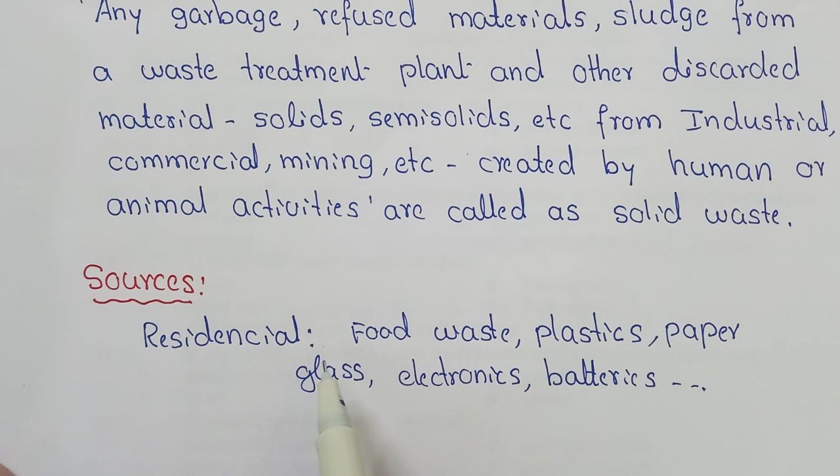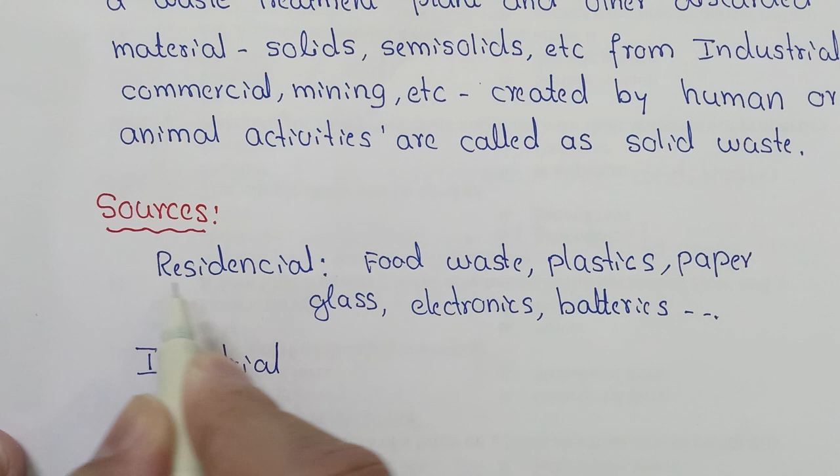The solid waste entering the environment, with residence as the source, is called residential solid waste. Then we have the solid waste coming from industry, called industrial solid waste. One is residential source, the other is industrial source.

The industrial source - these industries are known to be one of the biggest contributors of solid waste, which may include light and heavy manufacturing industries, construction sites, fabrication plants, manufacturing industries like the manufacture of plastics, tires, clothes, etc. Then construction industry or construction sites.

Then fabrication plants, refineries, power plants, processing plants, mineral extraction, chemical plants, etc. These industries produce solid waste in the form of housekeeping waste, food waste, packaging waste, ashes, construction and demolition materials, special materials used as primary source for their production, medical waste, as well as other hazardous waste. So many types of waste produced in the form of solid from industries is called industrial waste.

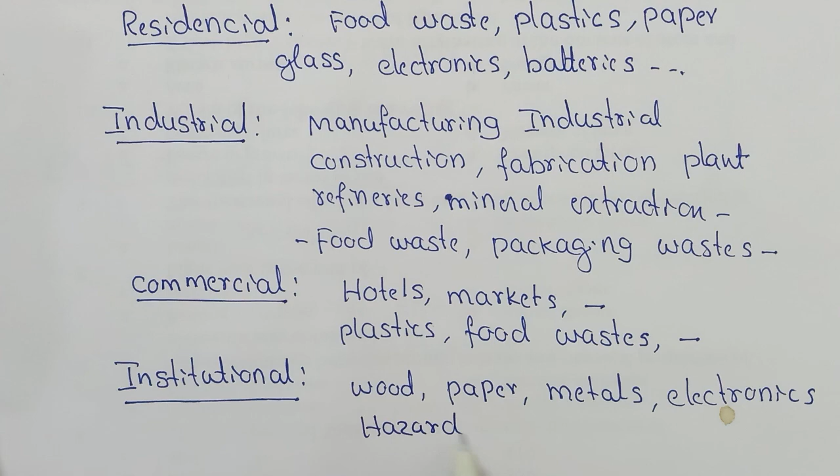Then we have the source of solid waste in the form of institutional - from institutes, different academic buildings, schools and colleges, including prisons, military barracks, and other government centers. Here also solid waste is produced. It may include glass, rubber waste, plastics, food waste, wood, paper, metals, cardboard materials, electronics, and some hazardous chemicals coming out in the form of solid waste.

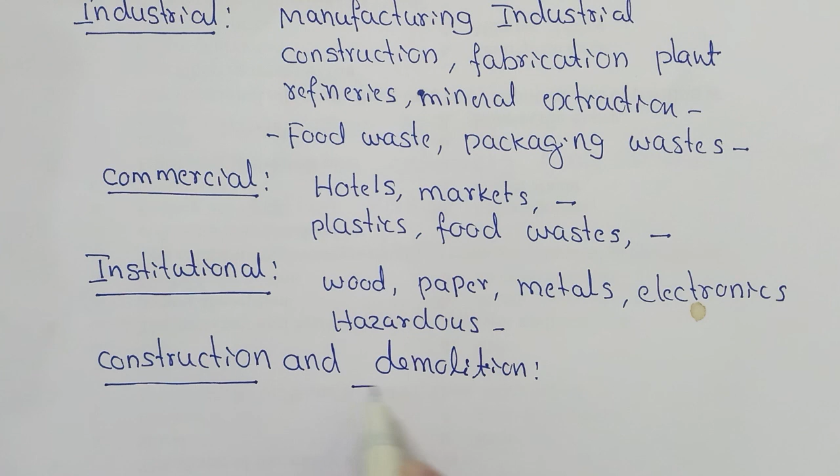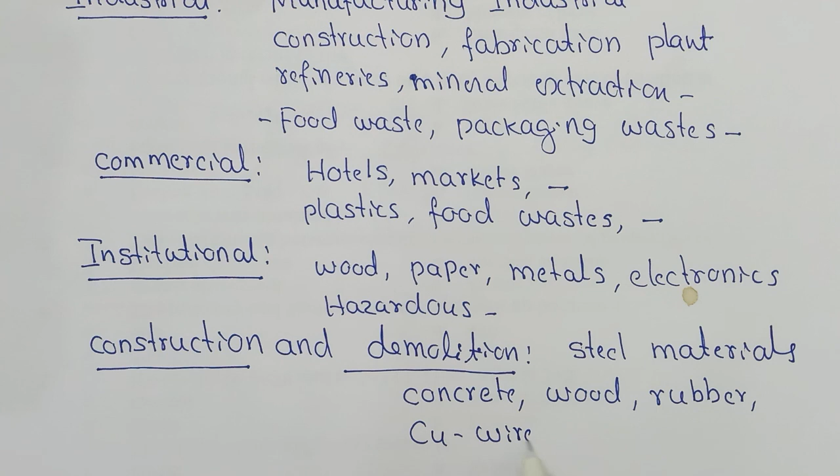Then we have the construction and demolition area. Construction and demolition sites also produce large amounts of solid waste entering the environment. Some of the solid waste produced in these places includes steel materials mainly, and it may also include concretes, wood, rubber, copper wires, etc.

Then the solid waste may also come from agriculture - crop plants or dairies are the solid waste which are coming from agriculture. The spoiled food, pesticide containers, and other hazardous materials coming from the agriculture field or source.

Then we have biomedical source, biomedical solid waste. This refers to hospitals, biomedical equipment and chemical manufacturing firms. Some of the solid waste include syringes, bandages, used gloves, drugs, paper, plastics, food waste, and some chemicals in the form of solid waste. All these require proper disposal, or else they will cause a huge problem to the environment and the people in these facilities, those who are nearby or utilizing other sources may be troubled because of this biomedical waste.

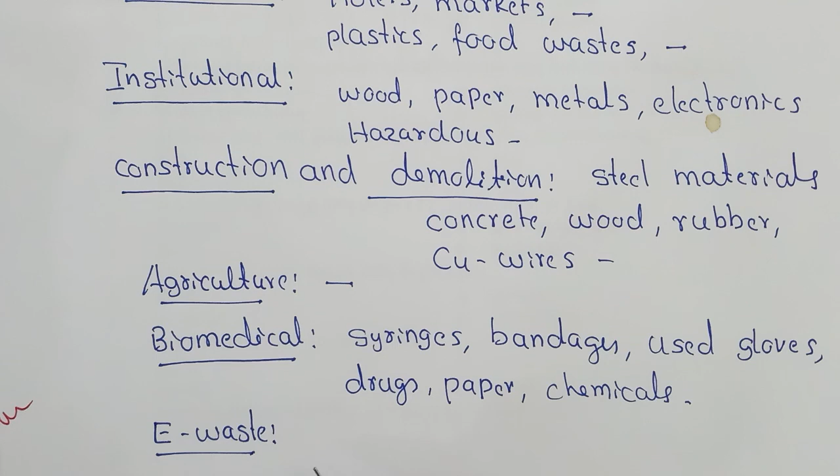And the last one is e-waste, electronic waste. The term for electronic products that have become unwanted, non-working or discarded materials. E-waste is created from anything electronic - it may be computers, televisions or monitors, cell phones, VCRs or CD players, or fax machines, printers, etc.

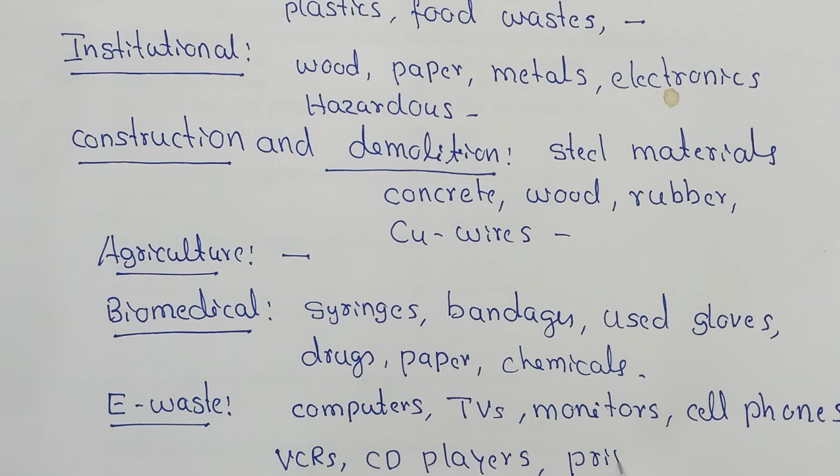Now these are all the sources. Mainly we have residential, then industrial, commercial, institutional, construction and demolition, agricultural, biomedical and e-waste.

Dear friends, we have seen what is solid waste and what are the sources for solid waste. Now let us see what is solid waste management.

A lot of solid waste is produced mainly because of human and animal activities. It enters into the environment and creates adverse effects. So how to manage it? What is solid waste management? It is the discipline associated with the control of generation, production of waste, storage of waste, collection, transport or transfer, processing and disposal of solid waste materials in a way that best addresses the range of public health, conservation, economics, aesthetic, engineering and other environmental considerations. So how best we can handle the solid waste that is produced is called solid waste management.

There are risks associated with poor management of solid waste due to improper disposal of municipal solid waste on the roads and immediate surroundings. Biodegradable materials undergo decomposition, producing foul smell and becoming a breeding ground for disease vectors. Industrial solid wastes are sources for toxic metals and hazardous waste that affect soil characteristics and productivity of soils. Toxic substances may percolate into the ground and contaminate the groundwater.

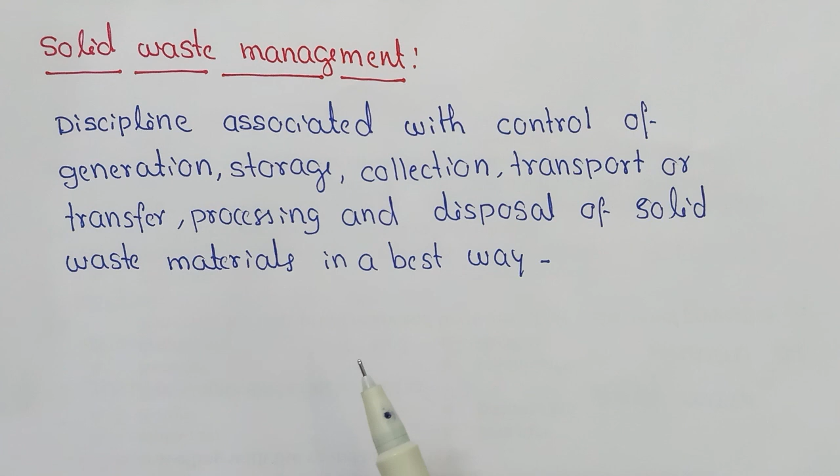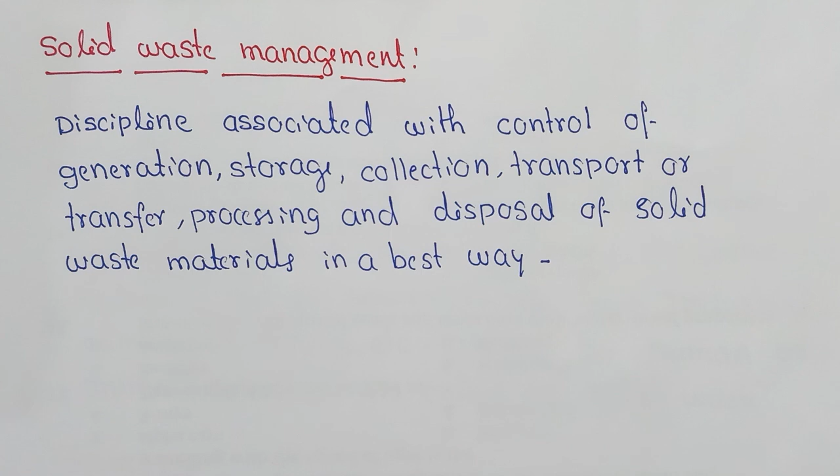Burning of industrial or domestic waste may include pesticides, plastics, radioactive materials, and batteries, and it produces furans, dioxins, and polychlorinated biphenyl compounds that are harmful to human beings. Fine grained materials, pathogens, decomposition of waste generating greenhouse gases and other gases, dust, smoke causes air pollution. Overall, environmental degradation occurs due to contamination of air, water, and soil via gaseous emission, particulate matter, ashes, etc. So the environment becomes irritated, the plants get irritated, human beings get irritated because of poor waste management.

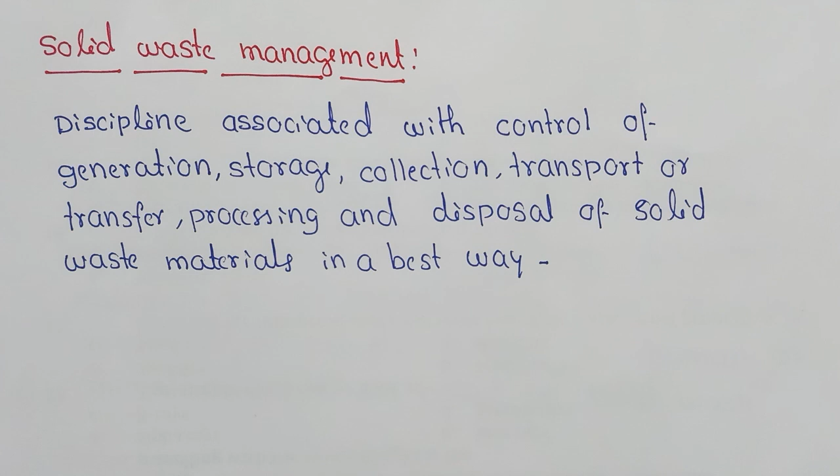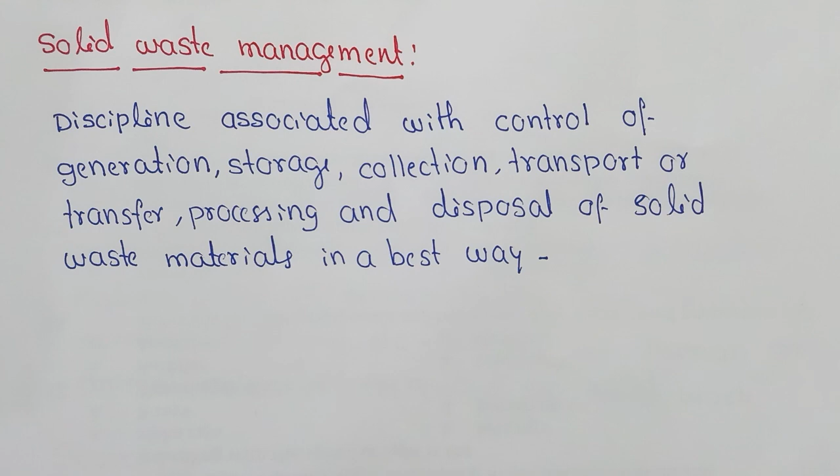If you don't manage it properly, it causes so much problem in the environment. It is not only human beings present in this universe, we also have other animals and plants. So all these systems will suffer if we do not manage the solid waste properly.

Dear friends, now let us see methods of waste disposal. Information and data on characteristics, physical and chemical properties of solid waste are important. So we have to first know the physical and chemical properties - how to handle it physically, what is the melting point, and what are the actions of that solid waste with the environment, with water, with the surrounding environmental constituents. This data must be known, it's very important.

Although there are many methods available to dispose of waste, let us discuss one by one. The first one is landfills. Throwing daily waste garbage in landfills is the most popularly used method of waste disposal used today. This process of waste disposal focuses attention on burying the waste in the land.

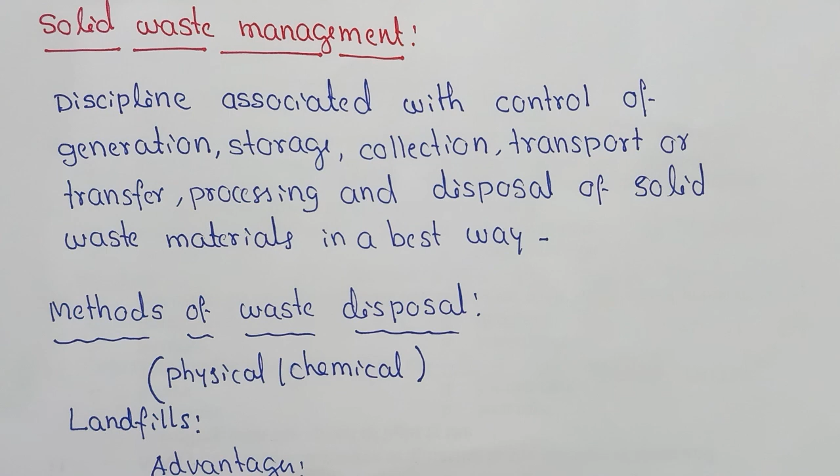Now, what are the advantages of landfills? The process is very simple and economical. Segregation of waste is not required. Landfilled areas can be reclaimed and used for other purposes. It converts low-lying marshy waste land into useful areas. Natural resources are returned to soil and recycled. Those are the advantages of landfilling.

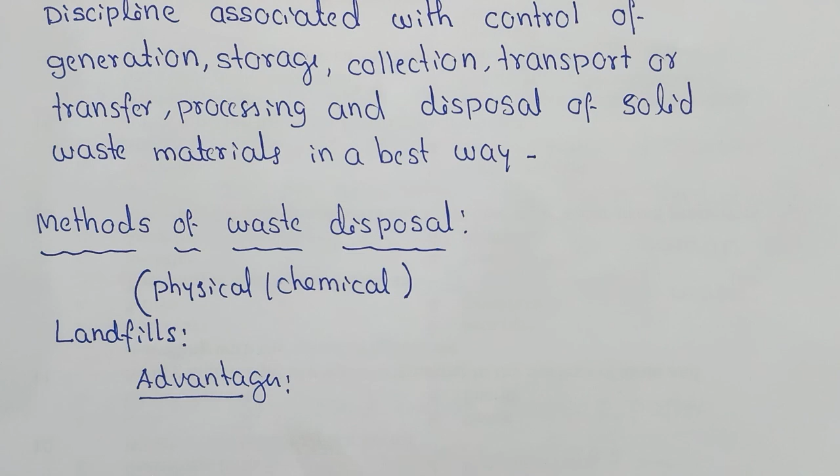There are some disadvantages. Large area is required. Land availability is away from the town. Transportation costs are high. It leads to bad odor if the landfill is not properly managed. Landfill areas will be sources of mosquitoes and flies, requiring application of insecticides and pesticides at regular intervals. It also causes fire hazard due to formation of methane in wet weather. Now these are all the disadvantages of landfills.

When it comes to landfills, burying the waste in soil, we have mainly modern landfill methods and scientific landfill methods. In the modern landfill, garbage is basically spread out in thin layers, compressed and covered with soil. Modern landfills are designed in such a way that the bottom of the landfill is covered with an impervious liner, made up of several layers of thick plastic and sand. This layer protects the groundwater from being contaminated because of leaching or percolation.

In the scientific landfill method, this method is developed with scientific design during construction. This method eliminates the risk of waste seeping underground, as the base layer is constructed of 90 centimeters of clay, thus arresting any seepage or leakage within the landfill.

On top of the base layer, a drainage layer is made up of soil measuring 15 centimeters in length, and a vegetative layer of 45 centimeters to minimize soil erosion. The presence of these layers ensures that leakage is collected before it seeps underground. This method also reduces the production of methane, since the layers soak most of the impurities in the waste disposed. Generation of methane is also slower compared to the ordinary landfill, so methane can be considerably decreased in scientific landfill compared to the modern landfill technique.

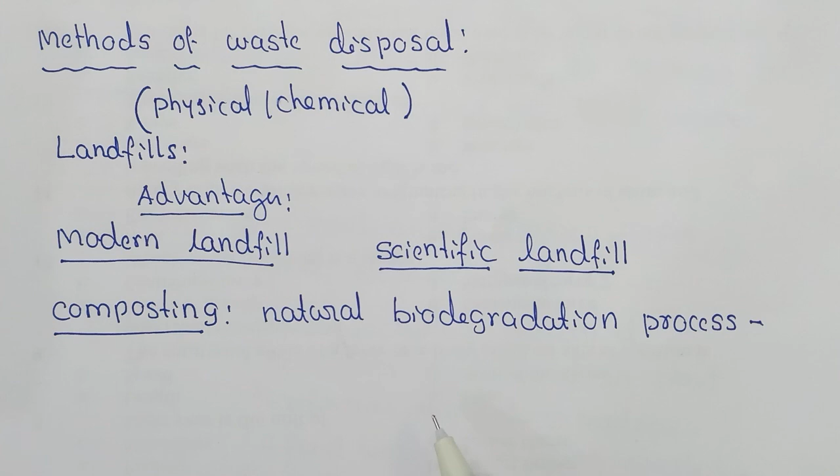Composting, normally used for organic farming, occurs by allowing organic materials to sit in one place for months until microbes decompose it. Composting is one of the best methods of waste disposal, as it can turn unsafe organic products into safe compost. On the other side, it is a slow process and it takes a lot of space.

Steps involved in composting: mainly, crude refuse is dumped into a container, and iron or metallic particles are removed by a magnetic separator. Then the material is transferred into the wet condition of a rotary cylinder. Waste moves from one end to the other through slow rotation of the cylinder, and air is introduced at low pressure throughout the length of the cylinder, where aerobic microorganisms undergo rapid decomposition under aerobic conditions. So these are the methods where natural biodegradation process takes place.

Under methods of waste disposal, we also have the method called recovery and recycling. Resource recovery is the process of taking useful discarded items for a specific next use. These discarded items are then processed to extract or recover materials and resources, or convert them to energy in the form of usable heat, electricity or fuel.

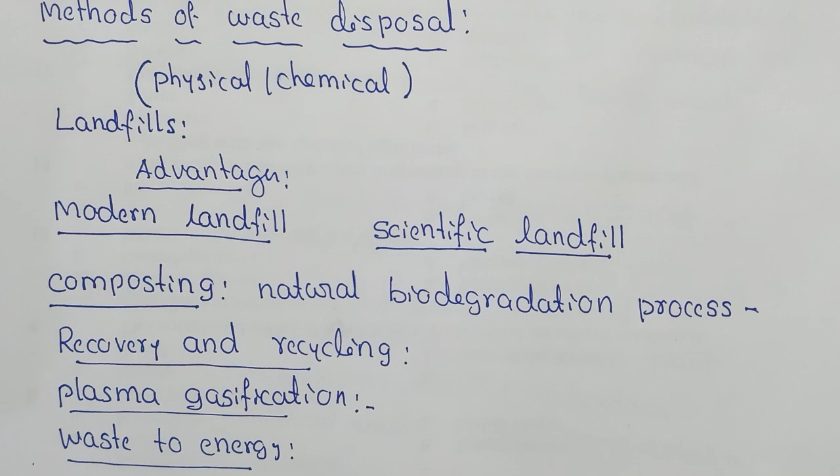Non-recyclable waste is converted into usable heat or electricity or into fuel by using a variety of processes. This type of energy source is a renewable energy source, as non-recyclable waste can be used over and over again to create energy. It can also help to reduce carbon emissions by offsetting the need for energy from fossil sources. It is the generation of energy in the form of heat or electricity from waste.

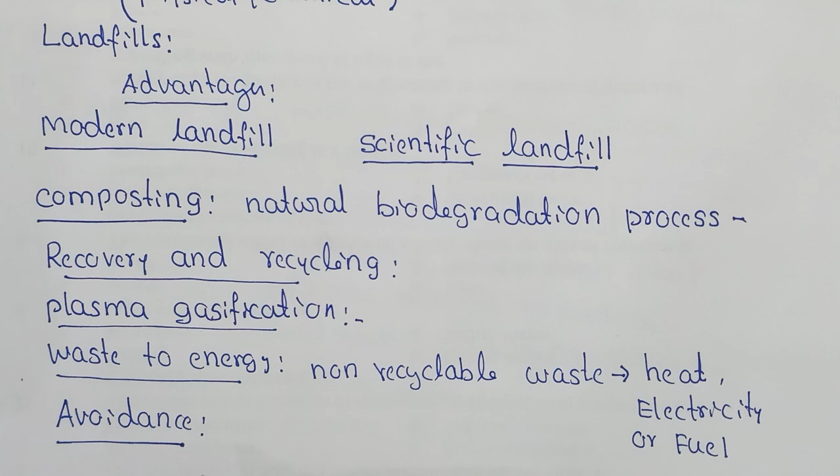Then the last method we have is avoidance, or waste minimization method. The easiest method of waste management is to reduce creation of waste materials. So as far as possible, we try to reduce the generation of solid waste or waste materials, thereby reducing the amount of waste going to landfills.

Waste reduction can be done through recycling old materials like jars and bags, repairing broken items instead of buying new ones, avoiding use of disposable products like plastic bags, reusing second-hand items, and buying items that use less packaging.

There are certain waste types that are considered hazardous and cannot be disposed of without special handling, which will prevent contamination from occurring. Biomedical waste is one example of such. So converting or reusing biomedical waste can be done. Any solid or liquid waste generated during the diagnosis, treatment, or immunization of human beings or animals is called biomedical waste or biological waste.

Now biological waste poses hazards due to two mainly principal reasons: one is toxicity, the other is infectivity.

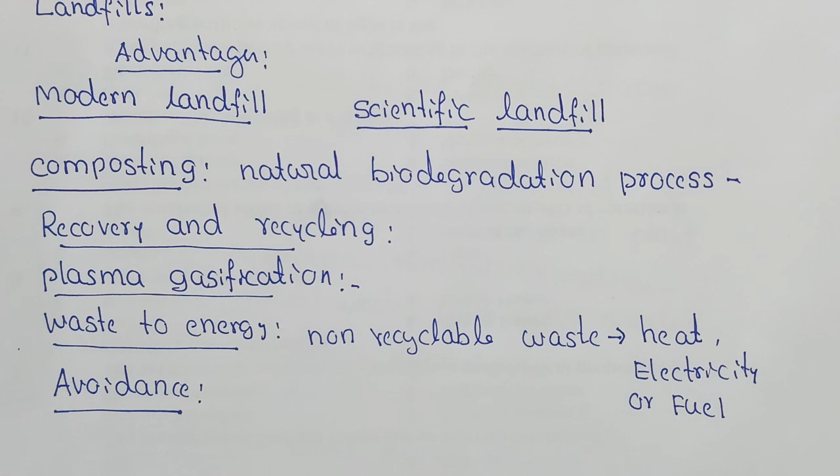Now let us discuss biomedical waste in the next video.